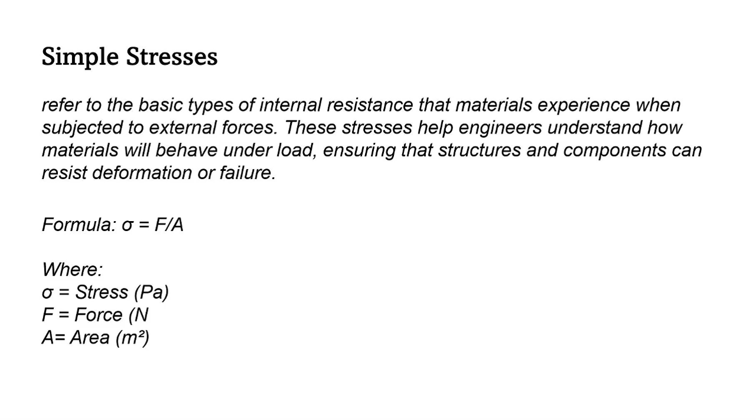So we have the types of stresses: the tensile stress, compressive stress, and the last one is the shear stress. So ano nga ba ang mga ito?

Tensile stress. Ito ay nangyayari kapag ang material natin ay hinahatak o ini-stretch. Ito ay dulot ng force na nagtutulak palabas mula sa dalawang magkabilang dulo. Dito, yung ating mga molecules ay hinihila papalayo sa isa't isa. Kumbaga, kapag lumampas ang force sa limit ng material, maaari itong magresulta sa fracture o pagkaputol.

Halimbawa na lang dito is yung ating mga ropes or cables. Isipin mo ang lubid kapag ginagamit natin sa towing o sa suspension bridges. Kapag hinihila ito sa magkabilang dulo, yung lubid ay nakaka-experience ng tensile stress, kumbaga hinahatak siya. At pwede rin ito sa ating mga metal sa mga laboratory test. Ang metal bars ay hinihila upang masukat ang kanilang tensile strength at makita kung gaano kalakas ito bago masira.

Ang formula din natin dito is sigma is equals to force all over area pa rin. Dito yung ating force ay yung ating pulling force na nagdudulot sa ating tensile stress or yung ating stretching. Sa area po is ganun pa rin, measured in square meter. Pangalawa po is yung ating compressive stress.

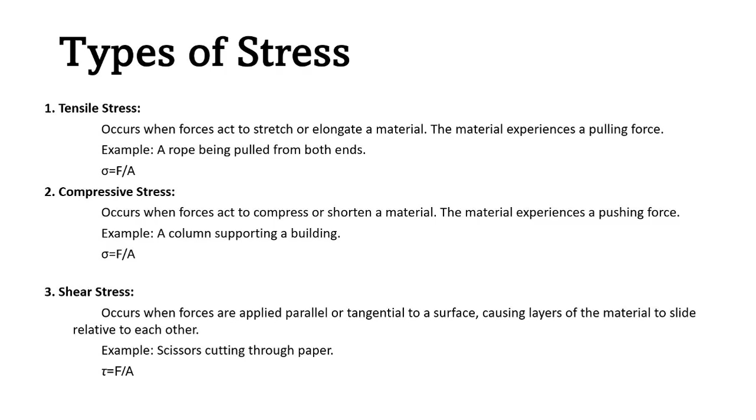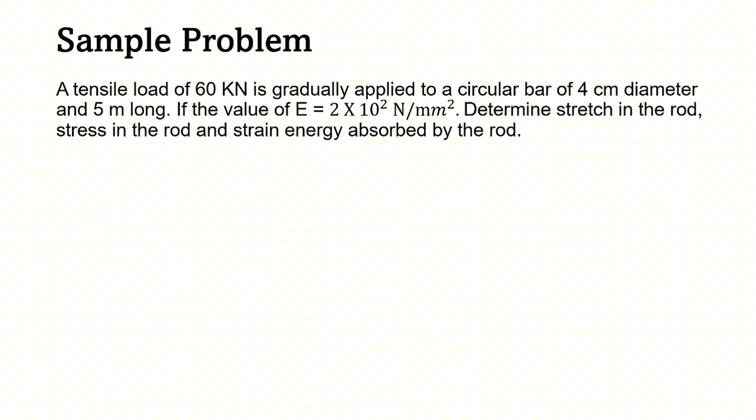So meron po tayo ditong sample problem. A tensile load of 60 kN is gradually applied to a circular bar of 4 cm diameter and 5 meter long. If the value of E elasticity is equals to 2 times 10 raised to 2 Newton per square millimeter, determine stretch in the rod, stresses in the rod, and strain energy absorbed by the rod.

Dito, meron po tayong given na load which is yung ating 60 kN. Tapos meron tayong circular bar na may diameter na 4 cm at may habang 5 meter, at elasticity na 2 times 10 raised to 2 Newton per square millimeter.

Ang gagawin lang po natin dito ay i-convert muna natin yung kilonewton to Newton. So 60 kilonewton times 1,000 is equals to 60,000 Newton. Ang diameter po natin na 4 cm to millimeter is 4 times 10 is equals to 40 millimeter. At sa length po natin na 5 meter, gagawin nating millimeter din, is 5 meter times 1,000 is equals to 5,000 millimeter. So same pa rin po yung ating formula katulad ng mga nabanggit ko kanina.

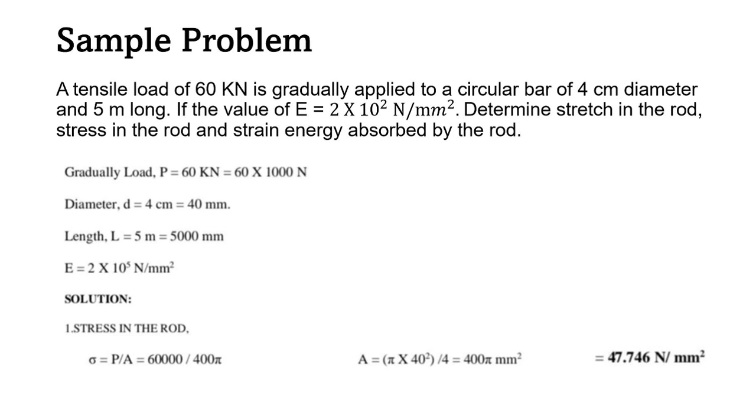So stress is equals to force all over area. Direct substitution lang po ito. Sa force natin is 60,000 Newton divide sa 400 pi. Ang area po natin, kaya naging 400 pi, ay area is equals to pi d squared all over 4, bale magiging sagot po natin dito ay 400 pi millimeter squared. So kapag direct substitute natin yung 60,000 Newton divide 400 pi, magiging sagot po natin sa ating stress ay 47.746 Newton per square millimeter.

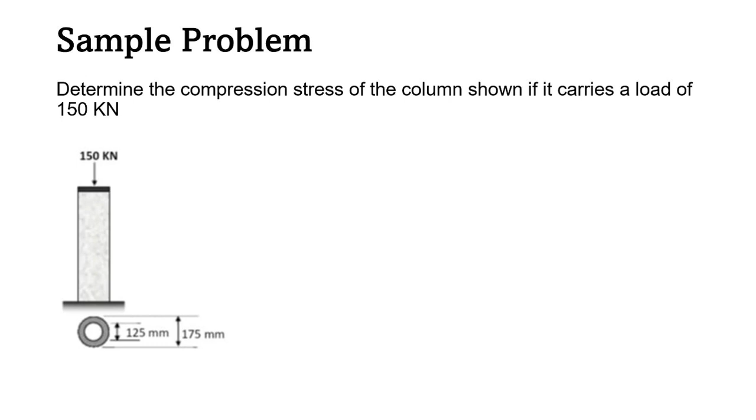So next problem po natin is determine the compression stress of a column shown if it carries a load of 150 kN. Dito, may given po tayo na 150 kN load.

Tapos sa ating diameter naman ay meron tayong outside diameter at inside diameter. Sa outside diameter natin ay meron tayong 175 mm at sa inside ay 125 mm.

Bale gagawin lang po natin dito ay yung kilonewton to newton ulit. So 150 kilonewton is equals to 150,000 newton. Sa area naman natin, kukuhain muna natin yung ating area. Area is equals to pi over 4 outside diameter squared minus pi over 4 inside diameter squared. Sasubstitute lang natin ito: area is equals to pi over 4 times outside diameter na 175 squared minus pi over 4 times 125 mm squared.

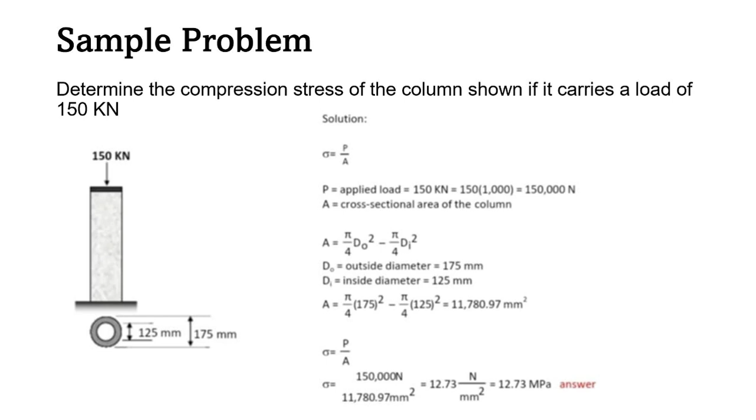Is equals to 11,780.97 square millimeter. So ang formula po natin sa compression ay sigma is equals to force all over area. Isa-substitute lang natin yung force natin na 150,000 Newton divide sa nakuha nating area na 11,780.97 square millimeter. At magkakaroon po tayong sagot na 12.73 Newton per square millimeter o simply 12.73 megapascal.

Last problem po natin para sa ating stress is a block of material is subjected to a shear stress of 250 kilopascal. If the material's modulus of rigidity, symbol po natin ay G, is 50 megapascal, calculate the shear stress.

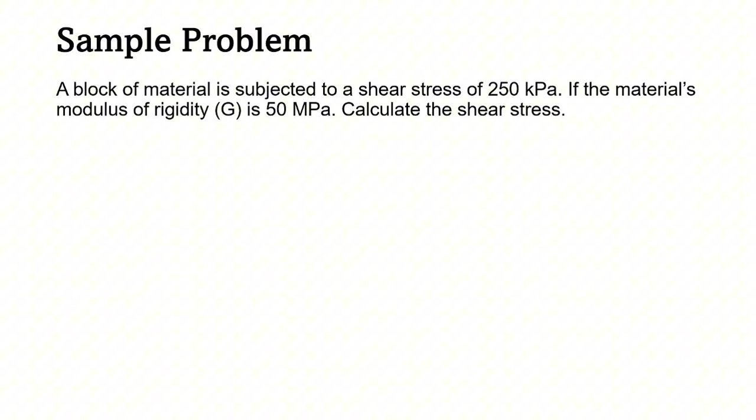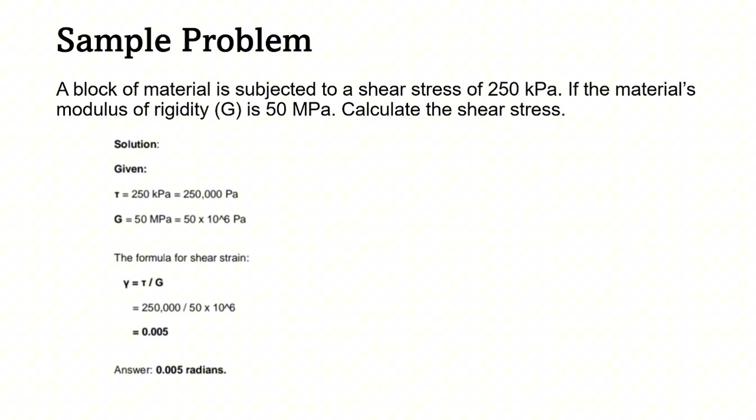Thank you. Under simple stress is what we call tensile strength and yield strength. Tensile strength is the maximum amount of tensile stress that a material can withstand before failing or breaking. It is a measure of a material's ability to resist deformation and fracture under tension. Knowing the tensile strength of a material helps engineers design a component that can withstand an expected load without breaking.

It is a crucial part for safety and efficiency of performance in structures like bridges, buildings, and vehicles. There are different definitions of tensile strength.

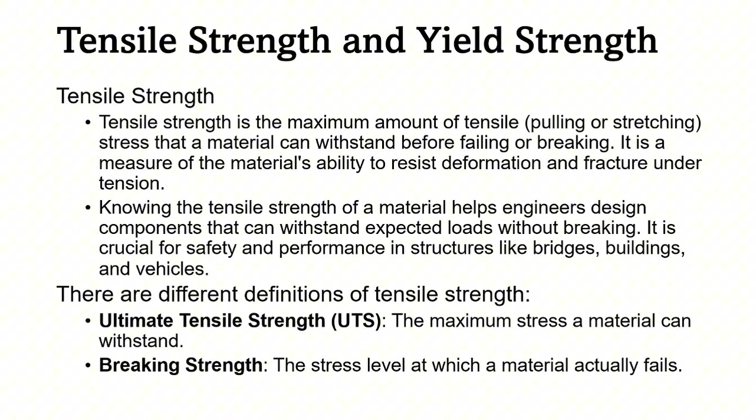First is the ultimate tensile strength, defined as the maximum stress a material can withstand. Second is what we call breaking strength, defined as the stress level at which a material actually fails. Next is yield strength. Yield strength is the amount of stress that a material can withstand without permanent deformation. Beyond this point, the material will undergo plastic deformation, meaning it will not return to its original shape when the load is removed.

Yield strength is a critical factor in engineering design, as it indicates the maximum load that can be applied to a material without causing permanent deformation. Also, it helps ensure that the structure will maintain its shape under normal operating conditions. In summary, both tensile strength and yield strength are crucial in material selection and structural design, with yield strength focusing on the onset of deformation, while tensile strength addresses the overall capacity to withstand force before failure.

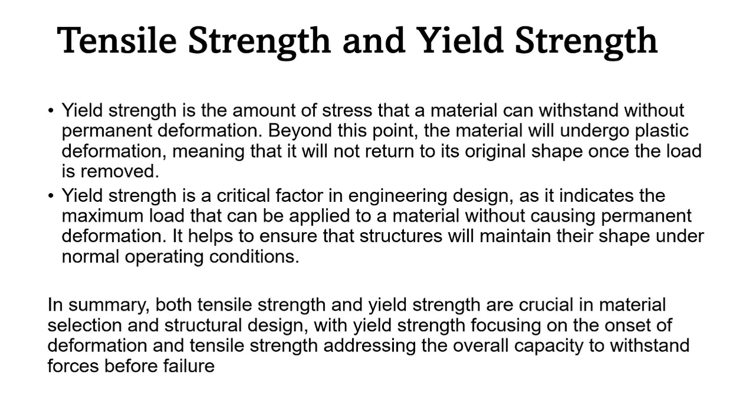Next is what we call the modulus of elasticity, also known as Young's modulus. It is a measure of the stiffness of a material. It represents how much a material will deform, either stretching or being compressed, when subjected to a given force. Essentially, it describes the relationship between stress and strain in the linear elastic region of the material's behavior. The formula for getting the modulus of elasticity is strain over stress.

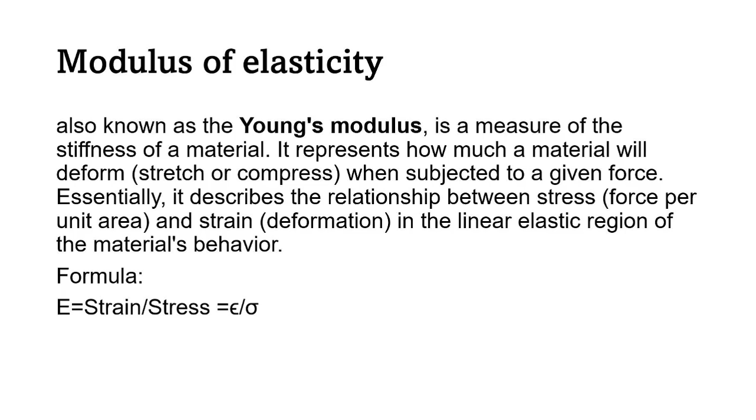Next is bending. Bending occurs when a force or a moment is applied to a material, for example a beam, causing it to deform or curve. This results in a distribution of compressive stress on one side of the material and tensile stress on the opposite side. The point in the material where there is no stress is what we call the neutral axis.

An example of bending application, number one, is beams and bridges. Bending is a primary consideration when designing beams, as they must support load without failing. Engineers must ensure the bending stress does not exceed the material strength.

Second is mechanical shafts. Shafts in rotating machinery such as motors and engines are often designed to resist bending stresses from applied loads. Third is what we call frame and support. The frame of a machine or building experiences bending when they carry heavy loads.

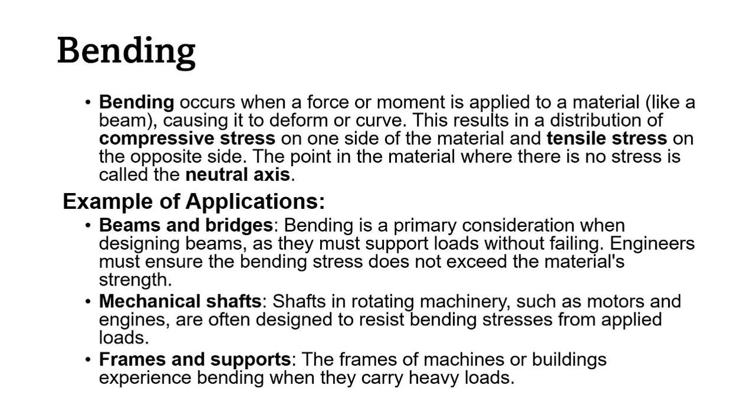Next is what we call torsion. Torsion refers to the twisting of a material or structural element when a torque, also known as rotational force, is applied along its axis. This leads to shear stresses within the material, causing it to twist. The degree of twist depends on the applied torque and the material's shear property.

Examples of the application of torsion: first is the drive shafts. In a vehicle, the drive shaft transmits power from the engine to the wheel and is subjected to torsion. Second is couplings and clutches. These components transmit rotational motion between shafts and must be designed to resist torsional force.

Third is gears and turbines. Gears in machinery and turbines experience torsional force as they transmit rotational power. Last is mechanical testing. Torsion testing is used to understand how a material or component will behave under twisting loads. This is essential for ensuring the reliability of parts like shafts and rods in rotating machineries.

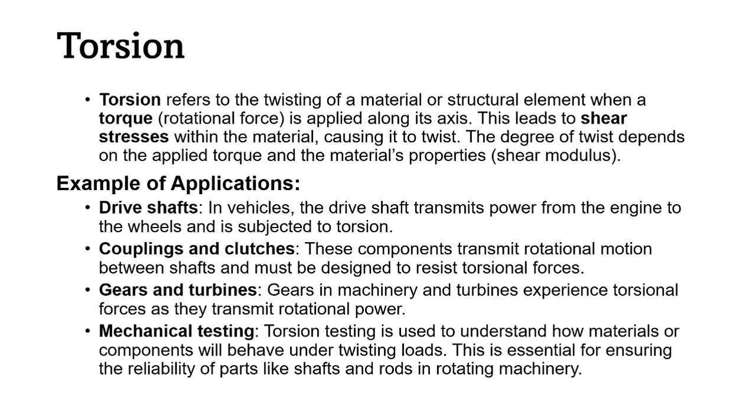Next is shear strain. Shear strain is a measurement of how much a material deforms when subjected to a shear stress. It represents the angular displacement between two parallel planes in the material, typically caused by force that acts parallel to these planes. When a shear force is applied to a material, the layers of material slide over each other, leading to a deformation which is quantified as shear strain.

Shear strain is represented by gamma, γ, and is defined as the ratio of displacement of one layer of a material to the distance between the layers. The formula for shear strain is gamma equals change in displacement over height.

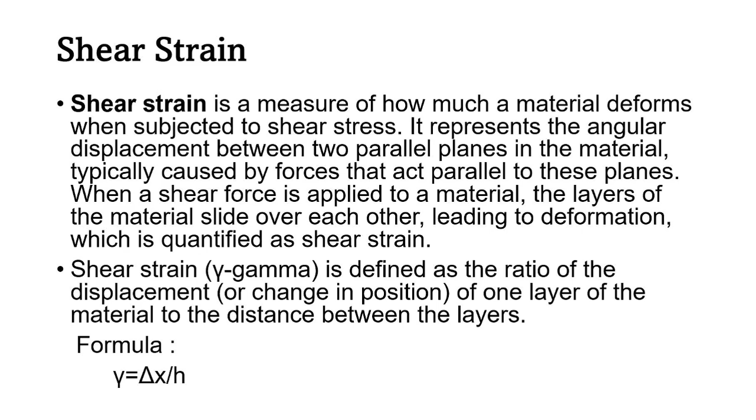Next is torque. Torque is a measure of a rotational force applied to an object, causing it to rotate around an axis. It is the turning or twisting force that results from applying a force at a distance from the axis of rotation. Torque is a fundamental concept in mechanical engineering, and it is critical in understanding how machines, vehicles, and mechanical systems work. Torque is the product of applied force and the distance from the axis of rotation, often referred to as the lever arm or moment arm. The formula for torque is T equals F times R times sine theta.

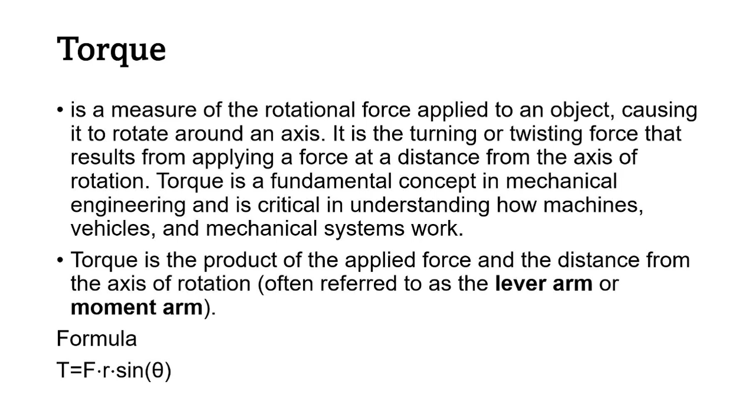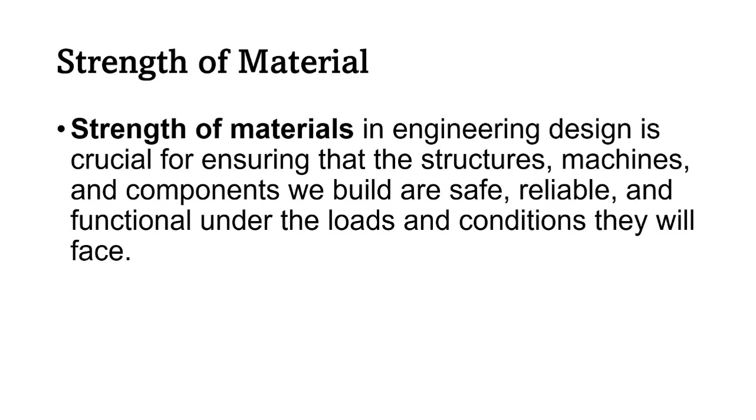Next is what we call strength of material. Strength of material in engineering design is a crucial part for ensuring that the structures, machines, and components we build are safe, reliable, and functional under loads and conditions that they will face. Here are the key reasons why material strength is important in engineering design.

Number one is preventive measures, for preventing failure. Material failure can occur when a material is subjected to a force beyond its strength limits, leading to cracking, breaking, or permanent deformation.

Number two is for safety purposes. Human safety is the top priority in design engineering. In engineering design, weak materials or improper material choices can result in accidents or disasters, especially in critical infrastructure like buildings, airplanes, or medical devices.

Third is optimizing performance. Material strength is also linked to how well a component can perform its intended function without failure or excessive wear.

Fourth is longevity and durability. Material degrades over time due to factors like fatigue, wear, and corrosion. Understanding material strength helps engineers predict how long a component can last before it needs to be replaced or repaired.

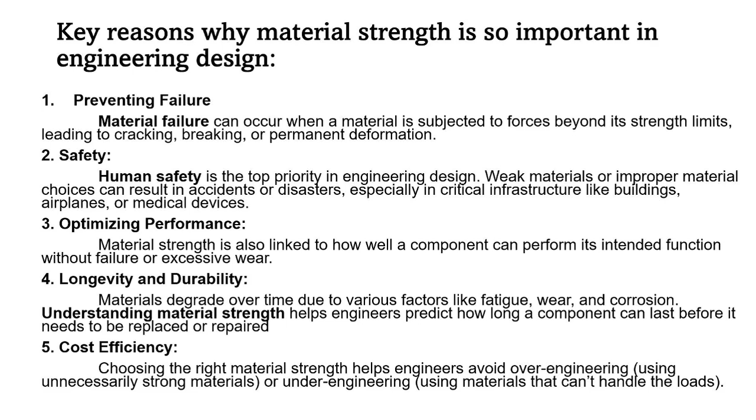After the key reasons of material strength, we will go to the factor of safety, also known as safety factor. It is a measure of how much stronger a system or component is than it needs to be for the intended load or stress. It provides a safety margin to account for uncertainties, such as material defects, unexpected load, or error in design calculation. Based on yield strength, the formula for factor of safety is yield strength of material over working stress.

Note that the yield strength is the stress at which a material begins to be deformed plastically. Second, working stress is the maximum stress expected in the material during normal operations. Based on ultimate strength, the factor of safety formula is equal to ultimate strength of material over working stress. Note that ultimate strength is the maximum stress that a material can withstand before failing or being fractured.

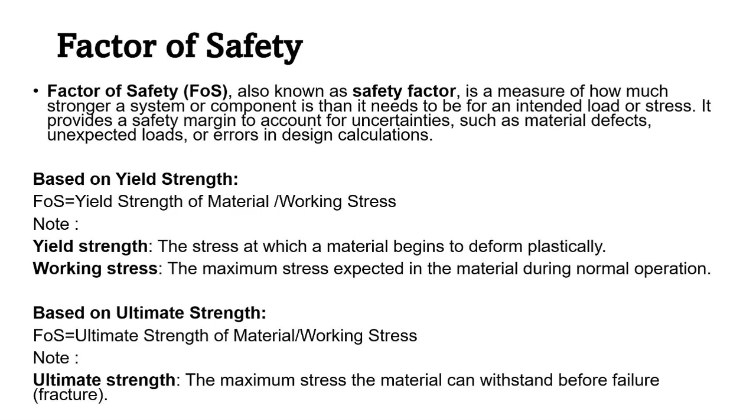Next is why we should always consider safety factors in our design as an engineer. First reason is to prevent failure, to account for uncertainties in material properties, manufacturing defects, and unexpected stress, reducing the risk of catastrophic failure.

Second is to account for unpredictable loads. Designs must be able to handle extreme or fluctuating loads that may go beyond the calculated values.

Third reason is human error. Safety factors can provide a margin for miscalculations, design mistakes, or variations in materials.

Fourth reason is about fatigue and wear. Components experience gradual wear and fatigue, so safety factors ensure long-term durability under repeated loading.

Compliance and regulation: many industries require safety factors to meet regulatory standards and to ensure public safety. And last is cost and efficiency. They help balance safety with efficiency, avoiding over-engineering while ensuring reliability.

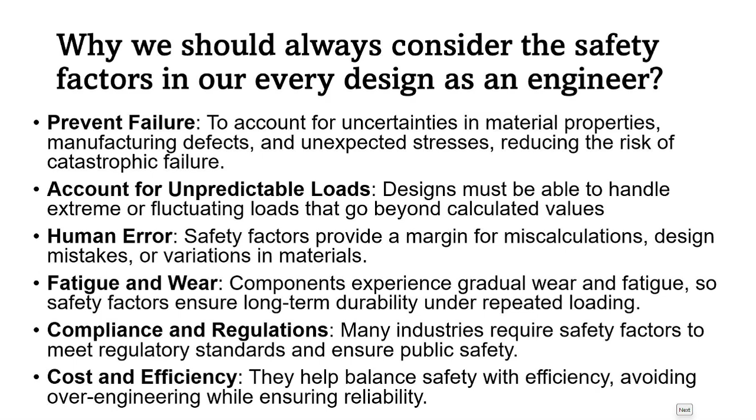Let us now proceed to tolerances and allowances. Since we are dealing with machine design, machines are made up of moving components, interconnected parts moving together as one. With that being said, these parts cannot be loosely or tightly fitted. There can only be a perfect range of motion in order for it to properly work. These are called tolerances and allowances. Tolerance is the total amount that a specified dimension is permitted to vary.

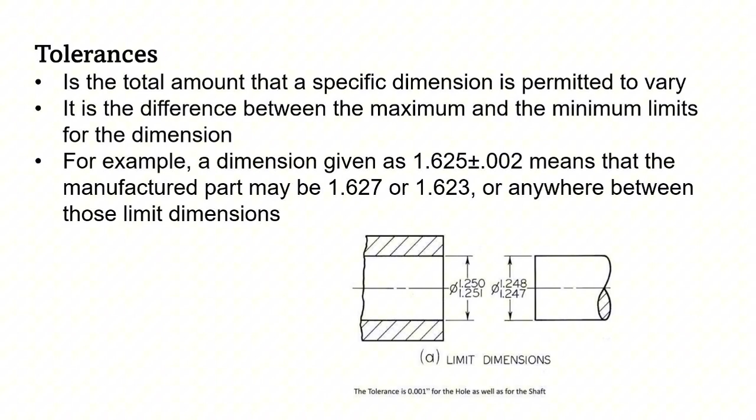This is the range of dimension that a part can be created, a variation in size. It is the difference between the maximum and minimum limits for the dimension. To get the value of tolerance, you need to subtract the maximum and minimum limits of the given dimension. For example, a dimension given as 1.625 plus or minus 0.002 means the manufactured part may be 1.627 or 1.623, or anywhere in between. So we subtract 1.623 from 1.627, and our tolerance is 0.004.

Next, types of tolerances. Unilateral tolerances: when the two limit dimensions are only on one side of the nominal size, either above or below, the tolerances are said to be unilateral. A case may occur when one of the limits coincides with the basic size. Given the name unilateral, uni meaning one, the tolerance only moves in one direction, either above or below.

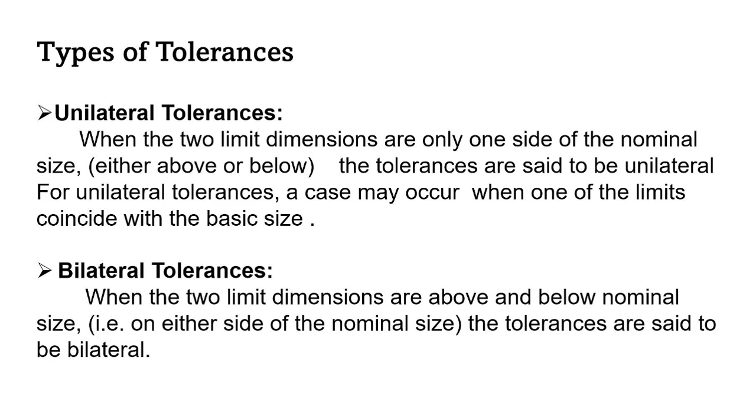In contrast, bilateral tolerances are when the two limit dimensions are above and below the nominal size, on either side of it. That means bilateral covers both directions, above and below, in which the dimension may vary.

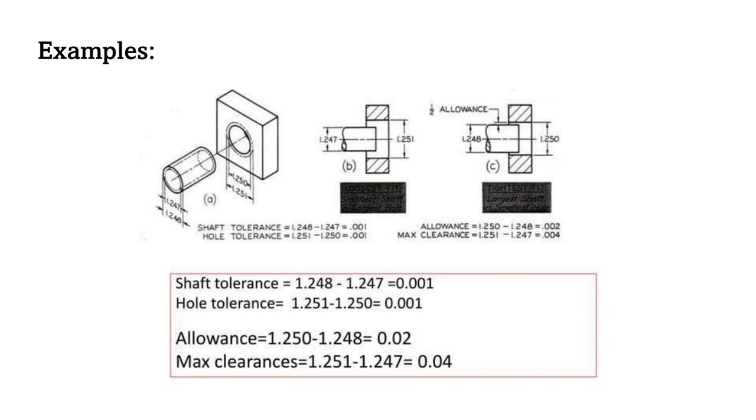Here are some examples of dimensions, and samples on how to compute for the tolerance. It's just subtraction. Next, specifications for tolerances, which are the ways for the units to be expressed.

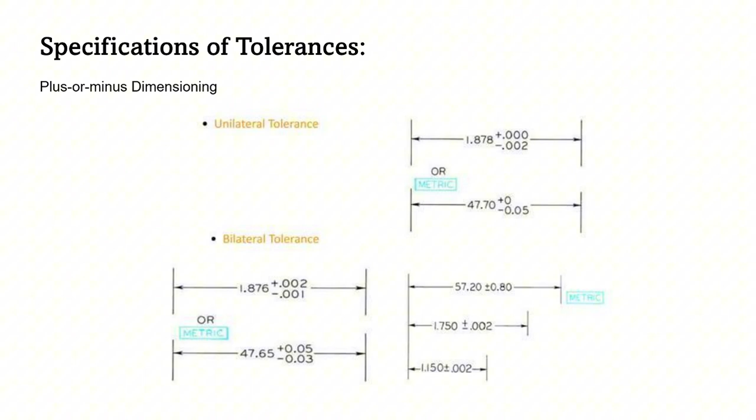Let's proceed to allowances. Allowance is the difference between the two dimensions of two mating parts, the hole and the shaft, for any type of fit. It is the intentional difference between the lower limit of the hole and the higher limit of the shaft. With the same type of computation, we subtract the higher limit of the shaft from the lower limit of the hole.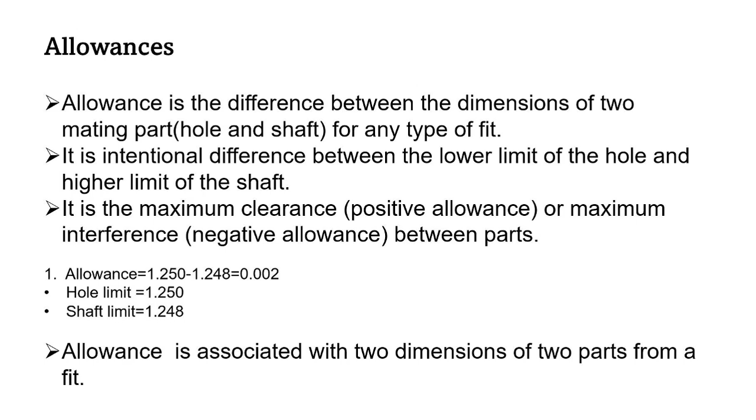It is the maximum clearance or maximum interference between parts. Maximum clearance means there is positive allowance, while a negative allowance is called interference. Allowance is associated with two dimensions of two parts from a fit.

Here are some examples again. The lower limit of the hole is the bottom part, and the upper limit of the shaft is at the top, so the allowance is the space between them.

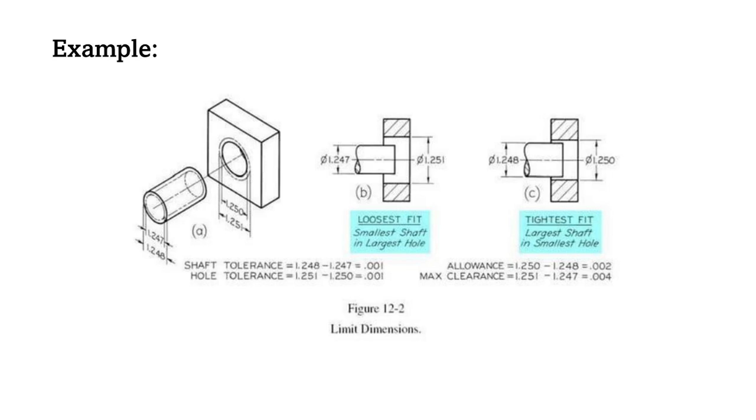Here are the differences between tolerance and allowance. Tolerance is the permissible variation in dimension of a part, hole, or shaft—it applies to only one part of a machine. Allowance, on the other hand, is the prescribed difference between the dimensions of two mating parts, the hole and the shaft—it applies between two parts.

Note that tolerance refers to the solid dimensions, while allowance refers to the space between the two mating parts. Tolerance is the difference between the lower and higher limits of the dimension of a part, while allowance is the intentional difference between the lower limit of the hole and the higher limit of the shaft. Tolerance applies to a single part, while allowance is between two parts.

Tolerance is provided on a dimension of the part, as it is not possible to make an exact specified dimension—it is the provided range a part may vary within. Allowance, meanwhile, is provided on the dimension of mating parts to obtain the required type of fit.

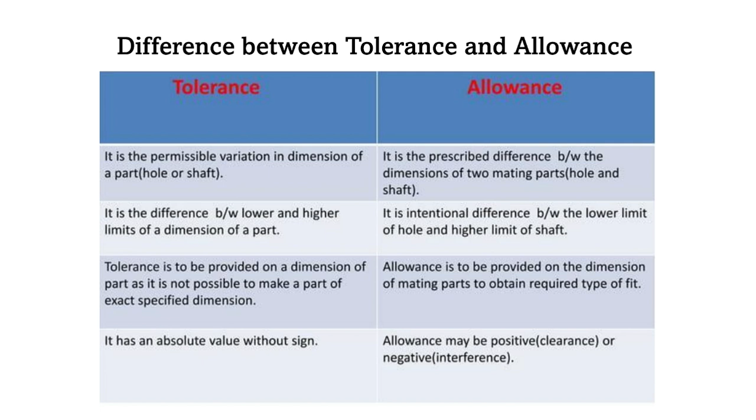Let's proceed to variable stress. In understanding stress concentration, whenever a machine component undergoes a sudden change in its cross-section, the uniform stress distribution is disrupted. This irregularity leads to a localized increase in stress, which we call stress concentration.

This figure shows a component that narrows in the middle, and you can see how the stress lines bend and crowd near the transition. This illustrates how stress accumulates in areas with abrupt changes, such as fillets, notches, holes, keyways and splines, surface roughness, or scratches. These stress concentrations can lead to failure, especially under cyclic loading conditions, making it essential to consider in engineering design.

Theoretical or form stress concentration factor. So to quantify the impact of stress concentration, we define the theoretical stress concentration factor, denoted as Kt. In mathematical formula, Kt is equals to maximum stress over nominal stress, where maximum stress is the highest stress occurring at the discontinuity, and nominal stress is the expected stress assuming a uniform distribution.

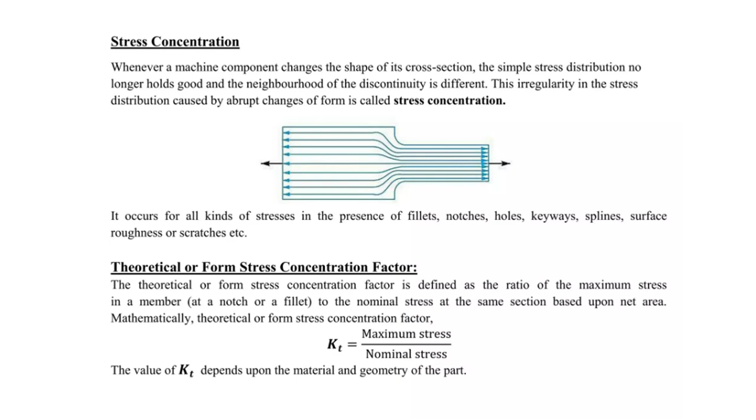Fatigue stress concentration factor, or K sub F. When a machine component is subjected to cyclic or fatigue loading, the theoretical stress concentration factor alone is not enough to predict failure. So instead, we use the fatigue stress concentration factor, denoted as K sub F.

For experimental test, it is mathematically defined as K sub F is equals to endurance limit without stress concentration over endurance limit with stress concentration. This factor accounts for how repeated loading affects the material's ability to withstand stress over time. Since determining fatigue stress concentration factor precisely is difficult, it is usually obtained from experimental data.

Notch sensitivity, or Q. In cyclic loading, the actual effect of a notch or fillet is often less severe than what is predicted by the theoretical stress concentration factor. This is because of stress gradient around the notch, and the material hardness influences how stress is distributed. So to quantify this behavior,

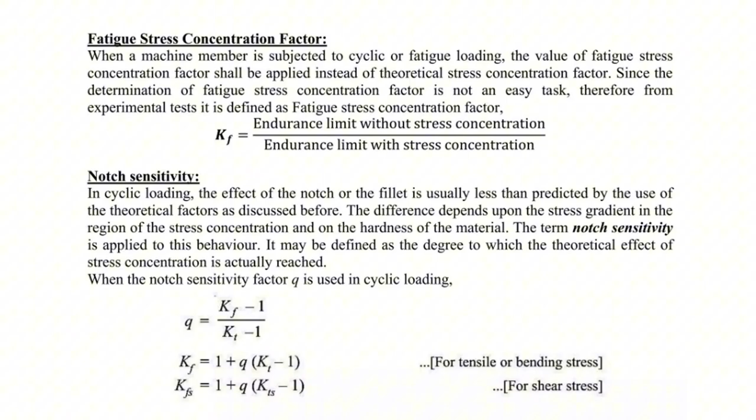Methods of reducing stress concentration. The figures shown illustrate different approaches to improving mechanical design and minimizing stress concentration. To better understand the figures, we have two sets of diagrams. The top set represents axial loading cases. The bottom set represents bending loading cases. Each set is categorized into poor, good, and preferred designs.

In axial loading cases, we have figure A, which is the poor design. It is poor because its abrupt changes in cross-section cause high stress concentration. This design is more prone to failure.

Figure B is a good design because it has a smoother transition, which is used to reduce the sharp stress risers. This helps in distributing the stress more evenly.

Figure C is the preferred design because it has incorporated smooth curves and fillets, reducing likelihood of stress accumulation. Additional grooves as seen in figure D further aid in stress distribution, such as keyways and notches.

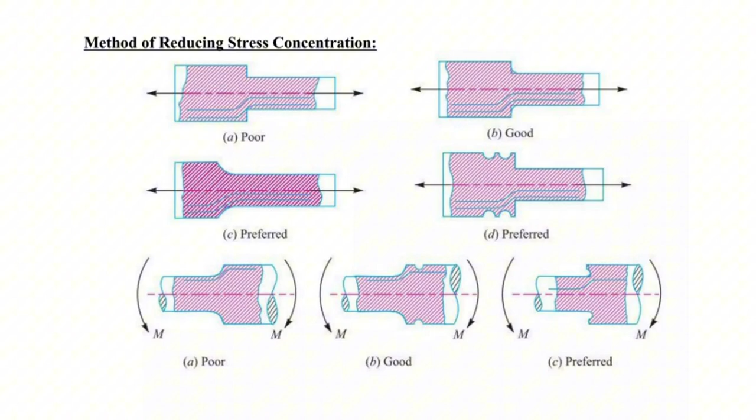In figure C, this is the preferred design because it has a well-rounded, smooth transition with additional features to further distribute stresses. This is the best design choice for reducing failure risk under bending loads.

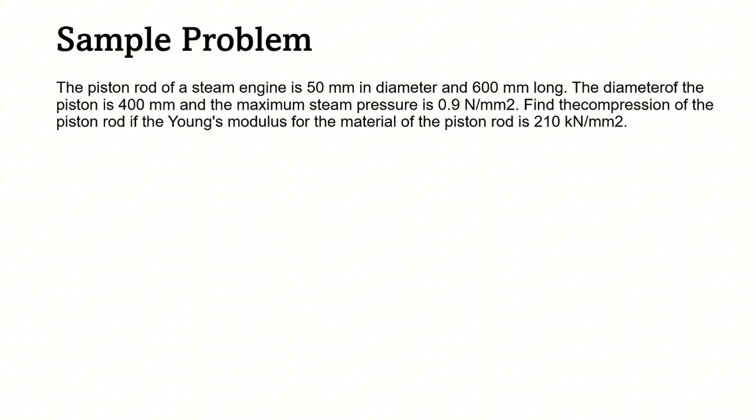Now let's proceed to the sample problem. The first problem states that the piston rod of a steam engine is 50 millimeters in diameter and 600 millimeters long. The diameter of the piston is 400 millimeters and the maximum steam pressure is 0.9 Newton per square millimeter. Find the compression of the piston rod if the Young's modulus for the material of the piston rod is 210 kilonewton per square millimeter.

So the given values are: 50 millimeters for piston rod diameter, 600 millimeters for the length of the piston rod, 400 millimeters for the piston diameter, 0.9 Newton per square millimeter for the maximum steam pressure, and 210 kilonewton per square millimeter for Young's modulus.

The first step is to calculate the cross-sectional area of the piston. The formula for cross-sectional area is A is equals to pi over 4 times d squared. So we can substitute the diameter of the piston: pi over 4 times 400 squared. And the answer will be 125,680 square millimeters.

So step 2 is to determine the maximum load acting on the piston due to the steam pressure. We have the formula P equals cross-sectional area times the steam pressure.

Substitute the values: 125,680 square millimeter times the maximum steam pressure value, which is 0.9 Newton per square millimeter. And the answer will be 113,110 Newton.

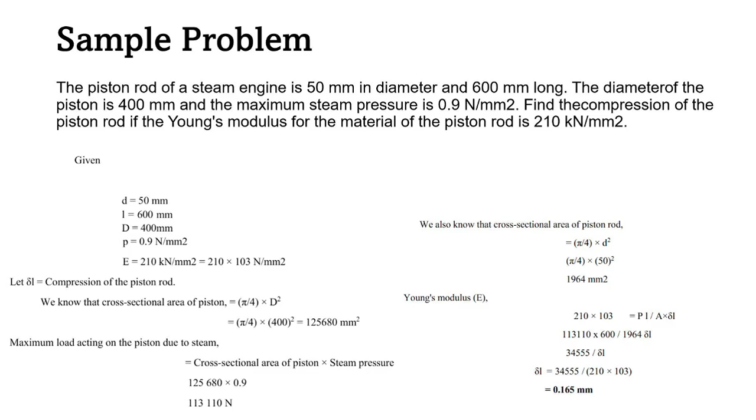The next problem: determine the thickness of a 120 millimeter wide uniform plate for safe continuous operation, if the plate is subjected to a tensile load with a maximum value of 250 kilonewton and a minimum value of 100 kilonewton.

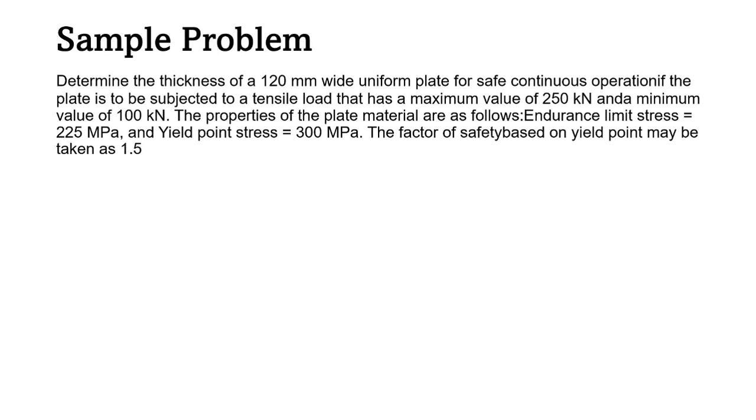The properties of the plate material are as follows: endurance limit stress equals 225 megapascals and yield point stress is 300 megapascals. The factor of safety based on the yield point may be taken as 1.5.

In the given data, we have plate width of 120 millimeters, maximum load of 250 kilonewton, minimum load of 100 kilonewton, endurance limit stress of 225 megapascals, yield point stress of 300 megapascals, factor of safety of 1.5, and the problem is to determine the thickness of the plate.

Step 1 is to calculate the mean load. The formula is mean load equals W max plus W minimum, all over 2. Substitute the values of maximum load and minimum load: 250 plus 100 over 2 equals 175 kilonewton.

Step 2 is to compute the mean stress. The formula for mean stress is sigma sub m equals mean load over area. Substitute the value: we have 175 kilonewton over 120T Newton per square millimeter.

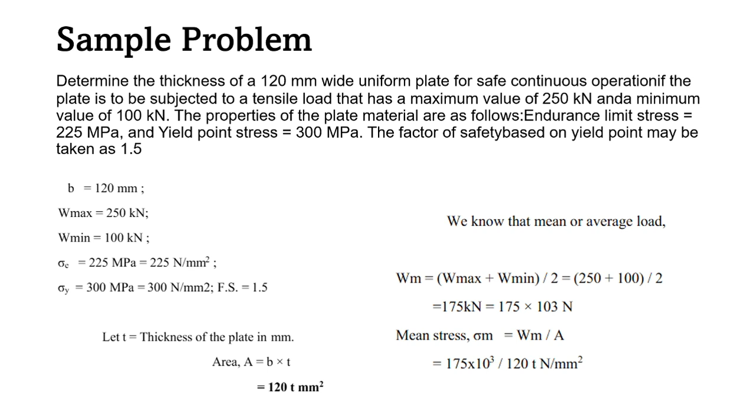Step 5 is to apply the Soderberg's formula. We have 1 over FOS (factor of safety) equals sigma M over sigma Y plus sigma V over sigma E. Substitute the values: 1 over 1.5 equals 175 kilonewton over 120T times 300, plus 75 kilonewton over 120T times 225.

We can solve this to find the required thickness of the plate. The answer will be 11.46, and rounding off we get the final answer, which is 11.5 millimeters. So the required thickness of the plate for safe continuous operation is 11.5 millimeters.

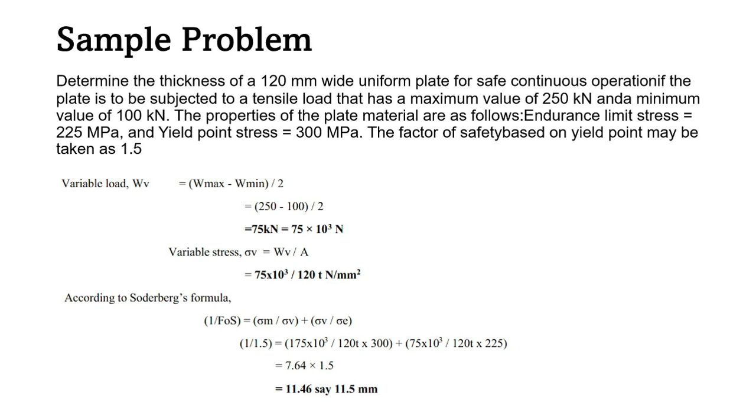Materials and their properties. The knowledge of materials and their properties is of great significance for a design engineer. Machine elements should be made of such material which has properties suitable for conditions of operation. In addition, a design engineer must be familiar with the effects which manufacturing processes and heat treatment have on the properties of materials.

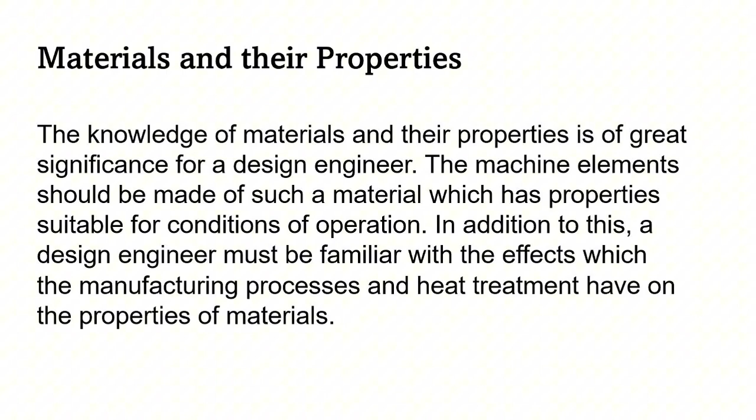We have classification of engineering materials. One is metals and alloys, including iron, steel, copper, aluminum - these are usually used materials. For non-metals, we have glass, rubber, plastics. Metals are further classified into ferrous metals, which contain iron, such as cast iron and wrought iron - anything with iron is classified as ferrous metals.

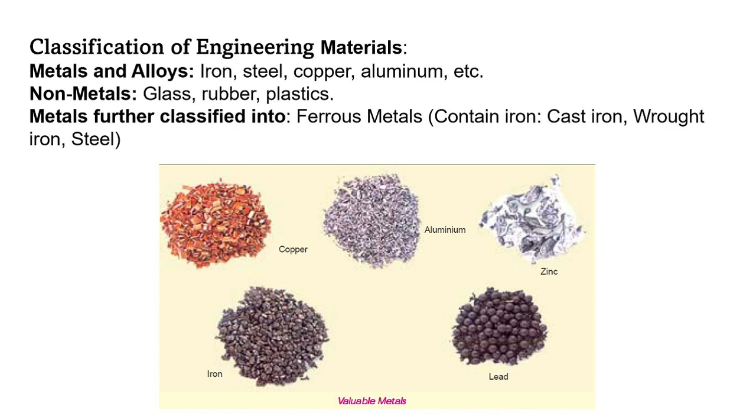We have selection of materials for engineering purposes based on availability, working conditions, and cost. We also need to consider their physical, chemical, and mechanical properties. First, we have availability, which refers to the ease of sourcing the material in the required quantity and quality. For availability, we need to consider where it can be bought, its supply, and also lead times for procurement.

That means the total time it takes from the moment a purchase order is placed with a supplier until it is delivered.

Next is our working conditions. This encompasses the environment in which the material will be used. This includes temperature extremes, corrosive atmosphere, for example exposure to chemicals or salt water, mechanical loads and vibrations.

Third is cost, basically how much a material costs and the expenses you will incur. We have material and material procurement cost, manufacturing and machining cost, and maintenance and life cycle cost.

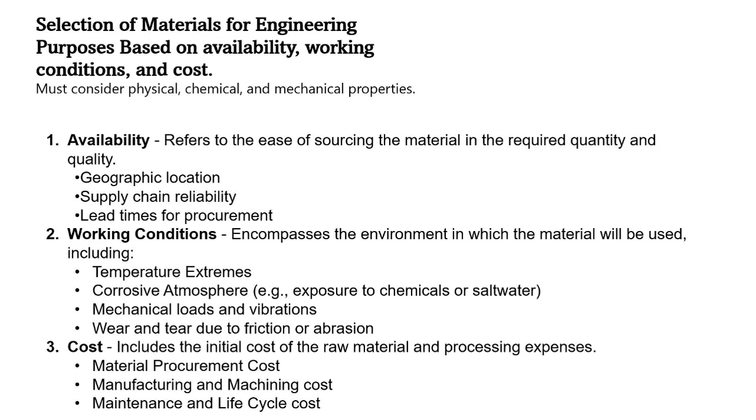Selection of materials for engineering purposes is based on availability, working conditions, and cost.

We have physical properties. These properties determine how the material responds to external physical forces. First is density, which affects weight and structural design considerations.

Two is thermal conductivity, how it absorbs heat, important for heat transfer. Electrical conductivity is critical for electronics and electrical applications. Fourth is the melting point, which determines suitability for high temperature applications.

The second is chemical properties, which define the material's resistance to chemical reactions. We have three: corrosion resistance, oxidation resistance, and reactivity.

Corrosion resistance relates to aggressive environments like marine and chemical plants that affect chemical properties. Oxidation resistance prevents deterioration in high temperature conditions. Reactivity refers to compatibility with other materials exposed to chemicals.

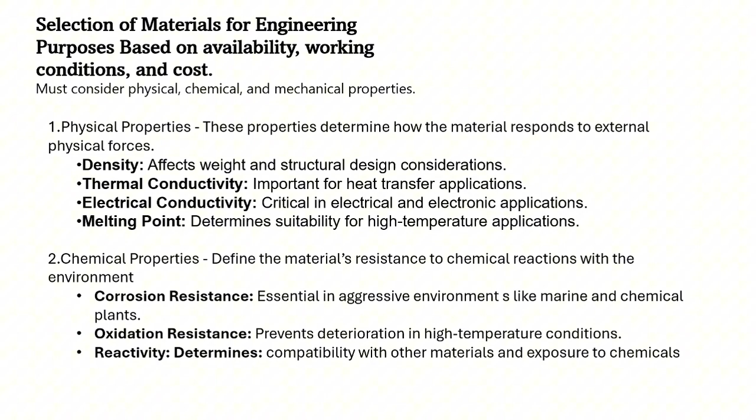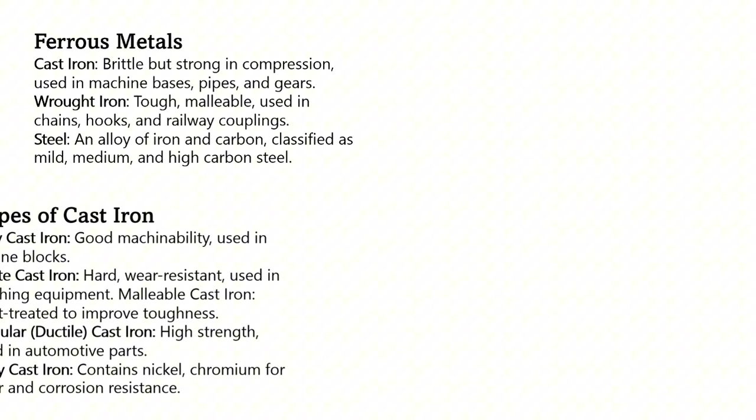Now, types of cast iron. We have five. First is gray cast iron, with good machinability, so it can be cut, used in engine blocks.

White cast iron is hard, wear resistant, used in crushing equipment, like testing machines that press onto other metals for crushing.

Nodular, also called ductile cast iron, has high strength, used in automotive parts. That is what we use.

Alloy cast iron contains nickel and chromium for wear and corrosion resistance.